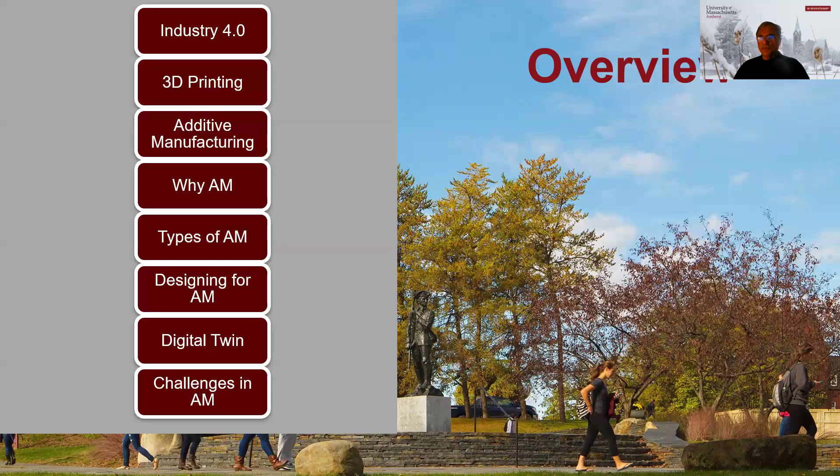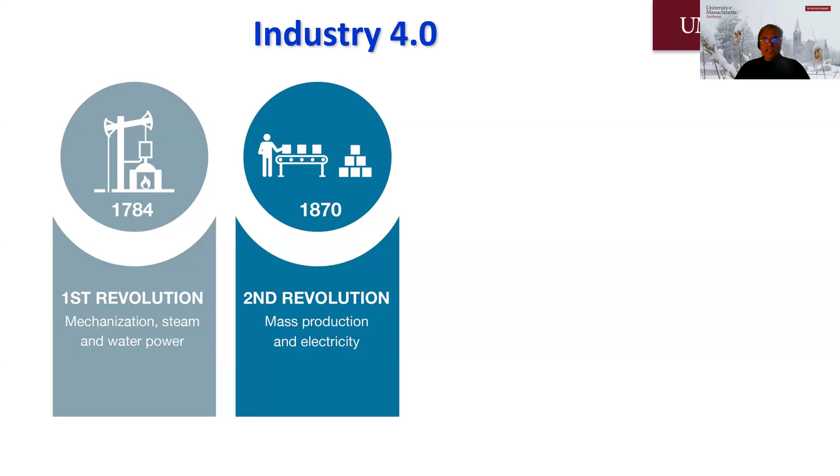Let me start by defining Industry 4.0. Probably some of you will be familiar with it, but it's nice to look at it in a cartoon way that illustrates the advancements we have made. We can go back in time and look at a definition of industry, probably somewhere in the 1780s - the first revolution, associated with mechanization. A lot of the work that came from that was primarily powered by steam or water. Then 100 years later, we got electricity, mass production became the norm, and electricity was a driver behind a lot of things that happened. Again it took another 100 years, then we started going into the third revolution. The date is a little fuzzy, but most people agree upon 1969 - electronics came into being, IT and other things, so automation became the real thing then.

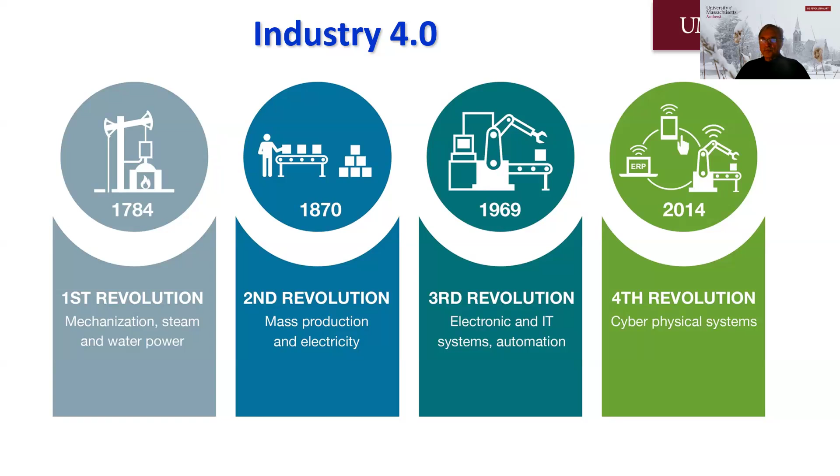And within 50 years, we have progressed to Industry 4.0, which has been kind of in vogue for the last 10 years or so, which is primarily connecting the dots between all the things in IoT, robotics, industrialization, mass production, customization. And so that's where we are now. A lot of people refer to advanced manufacturing as Industry 4.0, so you'll hear the term often in both academic and industry perspective.

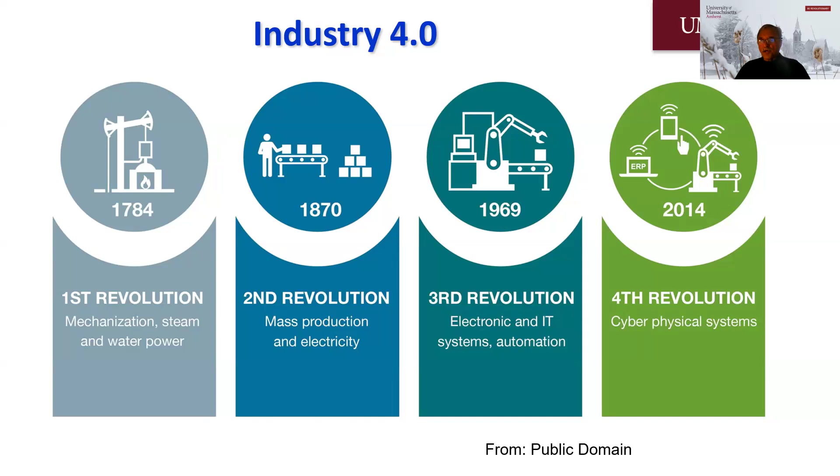So I typically cite sources for all the things I'm going to be talking about today, but this one you can find in the public domain. And this one I got from a colleague, and I don't have his notes with me right now.

So this is kind of a deeper dive into Industry 4.0. There are all kinds of things here. Primarily, it's the ERP, the Enterprise Resource Planning. That means you want to create an ecosystem where manufacturing is not siloed.

With all due respect to Arul and all our fond memories of TA, by definition, by referring to it as TA, it was decoupled from our education side. It was not physics, not chemistry. It was not a mechanical engineering course or civil engineering course. Rather, it was clubbed as technical arts. I still argue with people why that should not be the case.

But be that as it may, now if you see these things, lots of advancement is happening in different things. I'm going to just zoom in on two topics for today, even though our group has worked in some of the other things. But my primary interest all through my career has been in simulation, focusing on design and additive manufacturing. We got into it about 10 years ago, when things were in the right place, the right time, so to speak. So I'll walk through some definitions of additive manufacturing, and come back to simulation as the driver behind the digital twin.

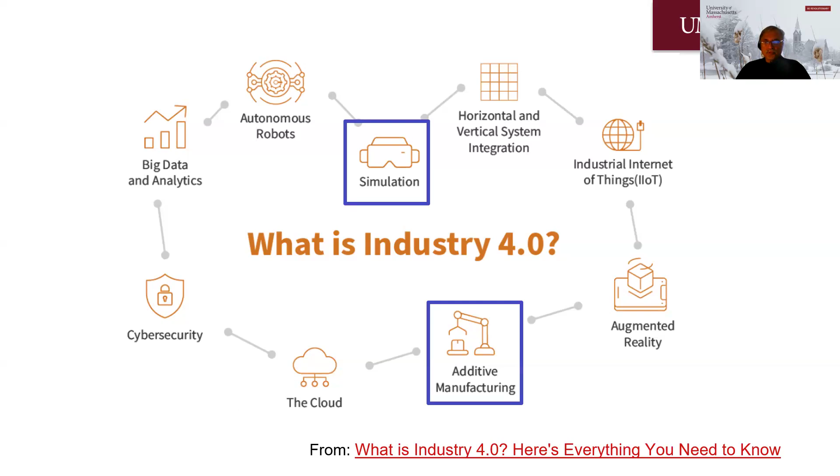All right, so what's additive manufacturing? It's straightforward. Arul mentioned CAD. It's a driver for additive manufacturing. You can go back in time. I know there have been jokes going around in different groups about orthographic views and all those things that we did as part of our engineering drawing. That is so passe. Everything is digital 3D, and CAD came into full existence in the 80s. That got me into my interest in design. And now that's a driver behind everything in additive manufacturing.

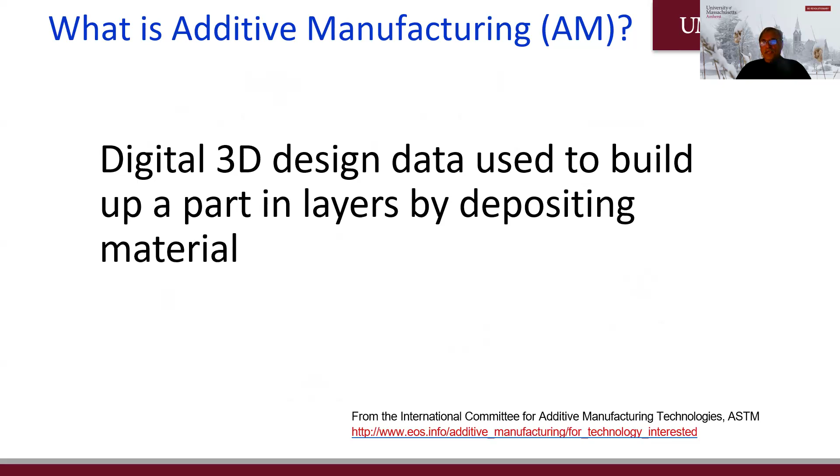So this is the formal definition. But oftentimes when you look at it, it makes perfect sense, because everything we learned about is subtractive manufacturing. We took a block of material. We did drilling, grinding, lathe work, any machining. The whole definition of a machine shop is to hit the block and reduce it to the part we want. And we can look back and say, hey, that's all subtracted from the block of material.

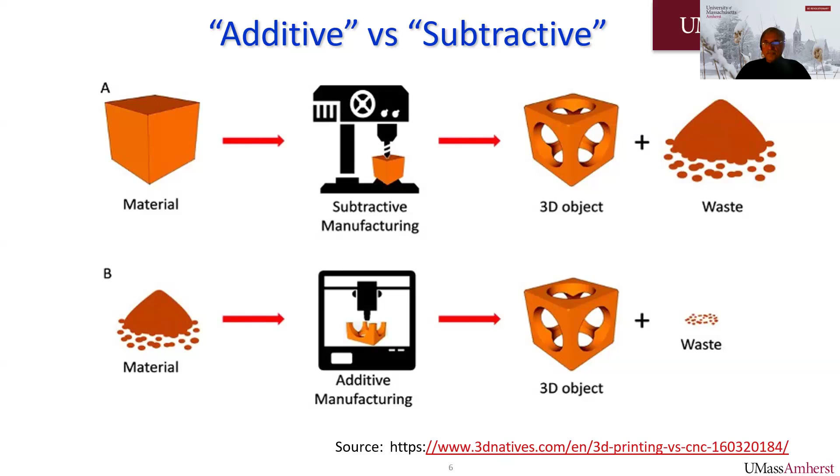Whereas additive manufacturing is mostly layer by layer: you take the material either in powder form or liquid form and construct it layer by layer. And that makes sense because now you are able to construct the object layer by layer. And if you're successful, the waste can be minimal. This is just a cartoon way of showing the same.

Another way of looking at this problem is that the subtractive process, material removal, is top down. We take from the top layer and go down to the bottom layer. Whereas with additive manufacturing, it's bottom up. You start with the base layer and go layer by layer to the top of your part. So you can look at it both ways, top down and bottom up.

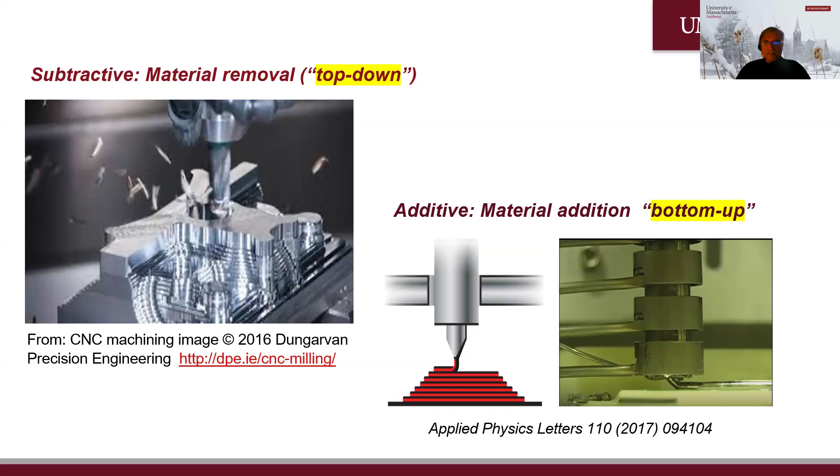But if you talk to people, especially in a non-engineering circle, you hear the term 3D printing. That makes sense because everyone can relate back to the inkjet printer and say, okay, instead of depositing ink, now we are depositing material. So in some sense, it is 3D printing, a synonym, but in the engineering sense it doesn't communicate the capabilities of additive manufacturing, which is that we can produce professional functional parts. I'll explain that in a couple of minutes.

And it clearly distinguishes it from all other processes we are more familiar with, referred to as subtractive. So additive manufacturing is a term used in professional circles, and people will use it to replace parts from a functional perspective.

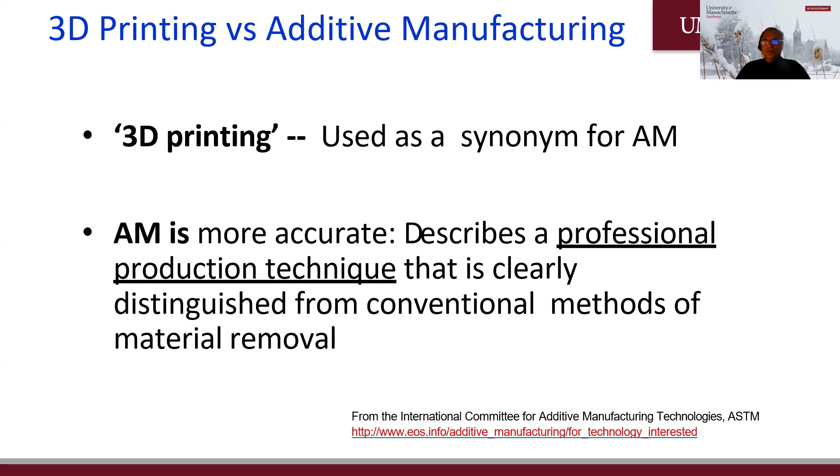Okay, so you see somebody has a question. No, I just put a comment. Okay, great. All right, I'll let you be the judge of that. Yeah, I'll monitor the chats.

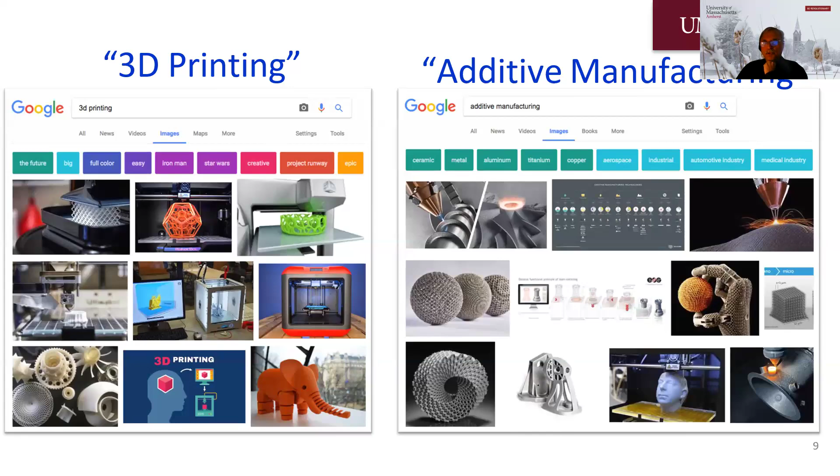There is a fundamental difference between 3D printing and additive manufacturing from how we plan to use it. So everything that we can see in terms of gadgets I refer to as 3D printing, and everything that's a functional replacement for a part that we want to use in our industry setting or other places would be the additive manufacturing part.

Okay, so then why? I will talk a little bit more about our NAE study, which is interesting in its own merits. But here are some slides from a friend that I work with, and we put these together. So we compartmentalize the rationale for additive manufacturing into 4 buckets. First and foremost, we can produce functional prototypes. So not necessarily in the production phase. In the prototyping phase, it can be cost prohibitive to invest in casting or anything more large scale, whereas a functional prototype using 3D printing or additive manufacturing can be an excellent start point.

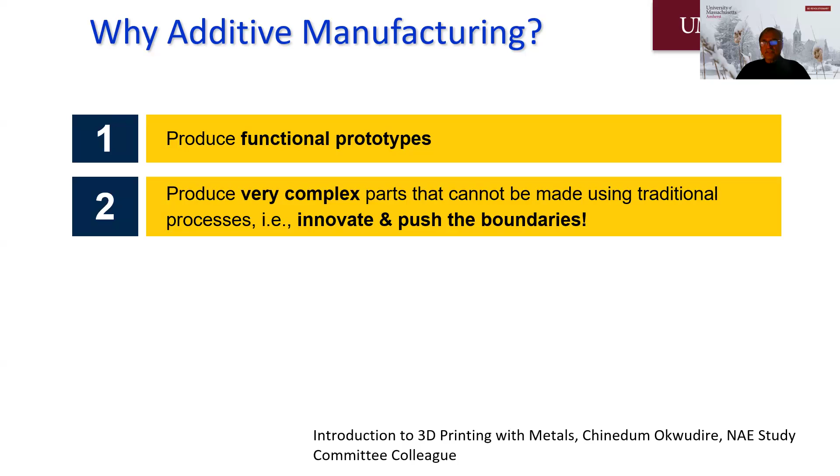We can produce very complex parts. I'll show some examples. And truly, this is where I think the most optimal use of additive manufacturing is: it puts innovation in front of all manufacturing engineers rather than at the back end, where after all the innovation is done, they just go make the part. So in that sense, it can push the boundaries. We can rethink our materials. We can rethink our CAD representations. We can rethink part structures, everything.

Of course, it's also viable for low volume. Whether you produce 1 part or 1,000 parts, the cost is proportional, not otherwise, as in the case of traditional. Last but not least, and this is some of the project work we do with the Navy and also one with the Air Force, is maintenance and repairs of parts that are sometimes not even in production anymore, or you're in a place where you can't afford to wait for the repair of parts to happen. So in those situations, additive manufacturing is an excellent alternative to the traditional way of manufacturing.

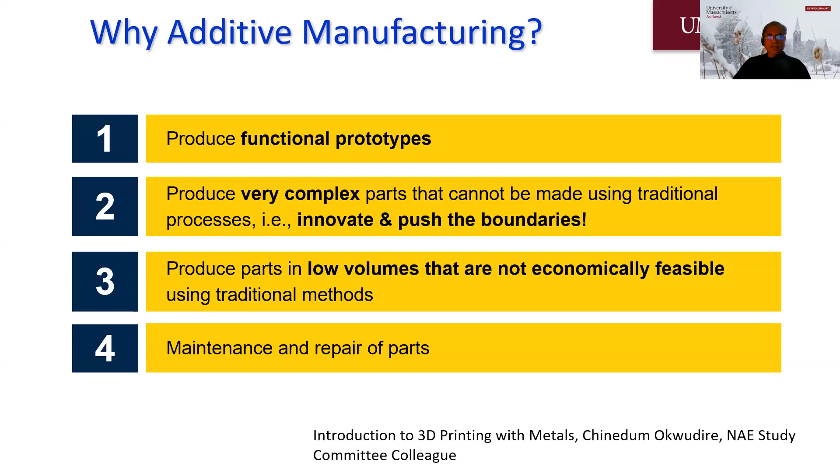Again, we've done some work with medical device companies, and the advancement is just absolutely mind-blowing. They can produce replacement parts which are light and strong and of inert material, and also customized to each individual patient. And we've seen this in use all the time, it is really happening. And last but not least, they found that these complex bone-like structures can actually stimulate bone growth.

So here, where we have taken a divergence from our traditional way of looking at it, is we are not constrained by the materials anymore. We can mix and match and produce materials that were previously unthinkable. And so I can show you some examples of this. I got this from the 3D printer.

So Sundar, in that particular example, what material is it? I will tell you in a minute. It's a kind of composite material, mostly ceramics with other things included, and I will get back to you on that. I don't have it on top of my head. I did work with the UMass Medical School on one of these for their implant, and I'd have to go back. But mostly we did it with ceramics and some other material mixed with it. I will get back to you on that. Good question. Okay, thank you.

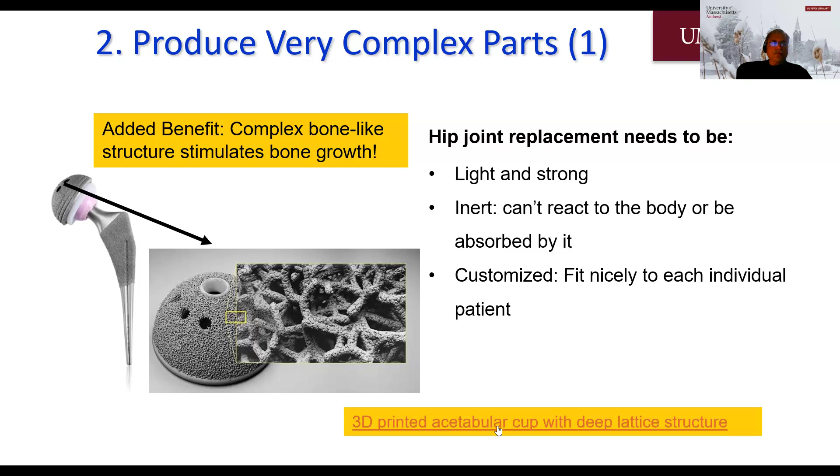And this is one of the coolest examples I have seen for producing complex parts, which are, again, not large in number, as in a prototyping phase or other things. It can be very helpful.

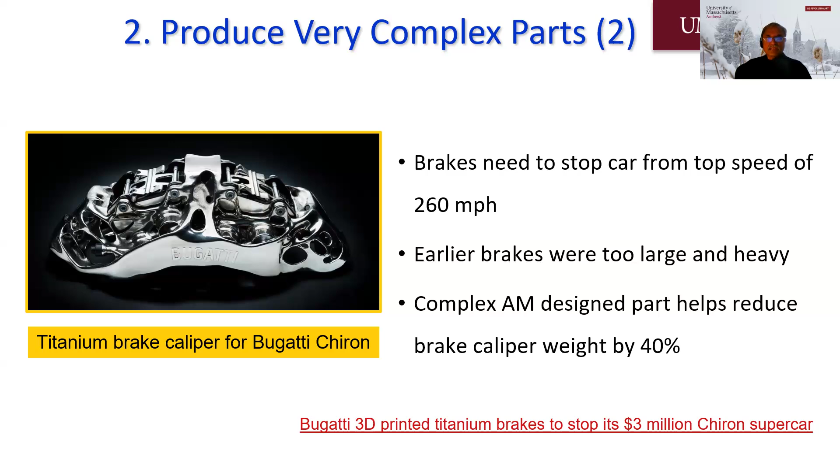The third one, again, is illustrative by itself. It's not a complex part, but you only need a few parts. This is typical for our industry partners, especially Raytheon. Raytheon has been funding our research for the last 25 years, and all their parts are low volume, and they don't want an outsourced place because of proprietary reasons. Even to enter the building, you have to have US citizenship, all kinds of protocols.

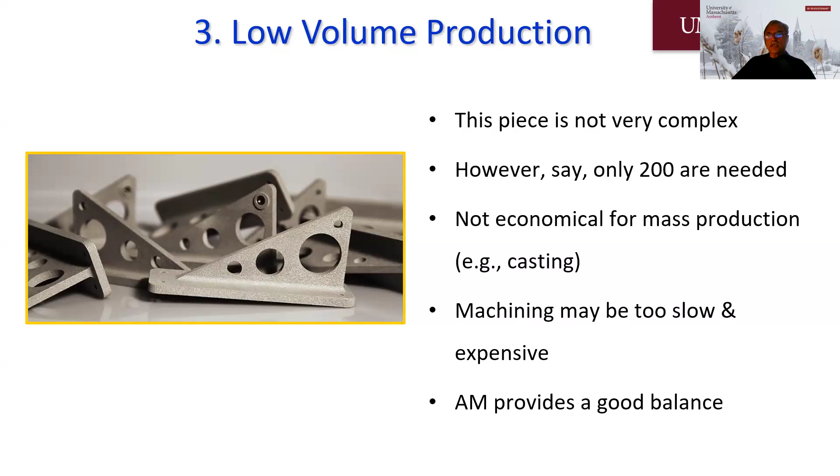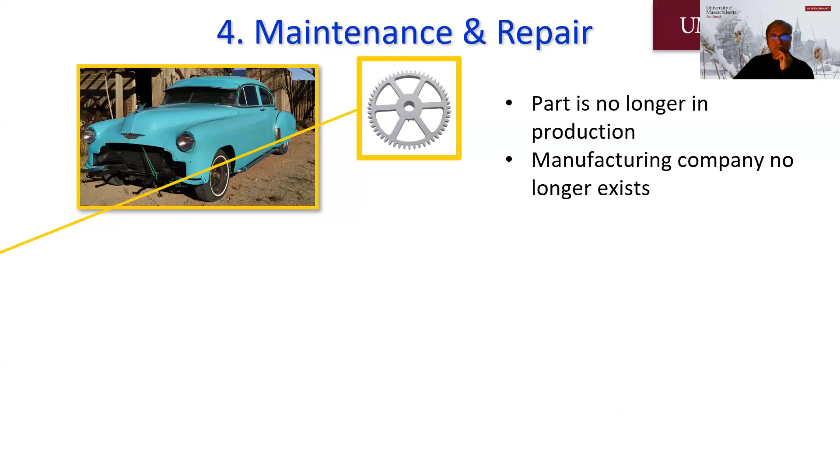And last but not least, this is the cartoon example of a part where you're trying to find a replacement part for your car. We put an old model car there, so the company is not in production, or the part is no longer available. You can 3D print the part and run it, and people have done it successfully. This is one of the projects we did as part of an SBIR phase 1 and phase 2 with a small company, and our work was not just the replacement part.

We were working with them on their naval system, where if the ship is out there miles away, how do we spot it? How do we do the inspection? How do we get the information back in the loop so they can have a digital twin set up at small scale to make a replacement in-house on the ship? They successfully did it for a couple of parts, but post-processing is another issue. So I would not say it's in practice, but it has been explored.

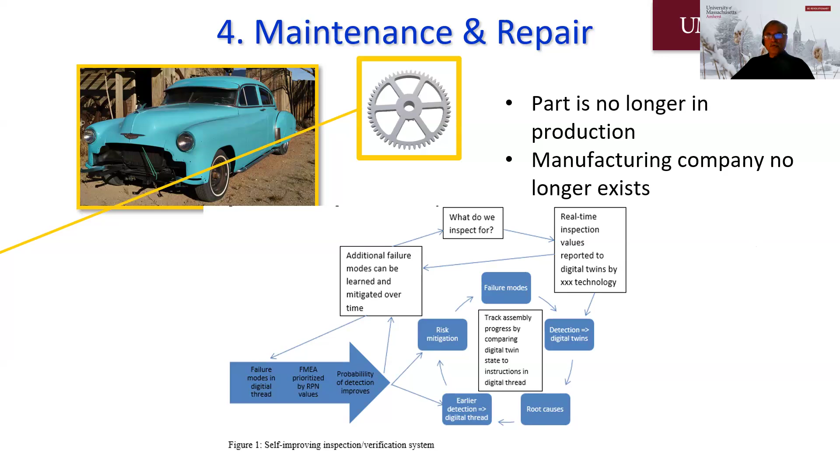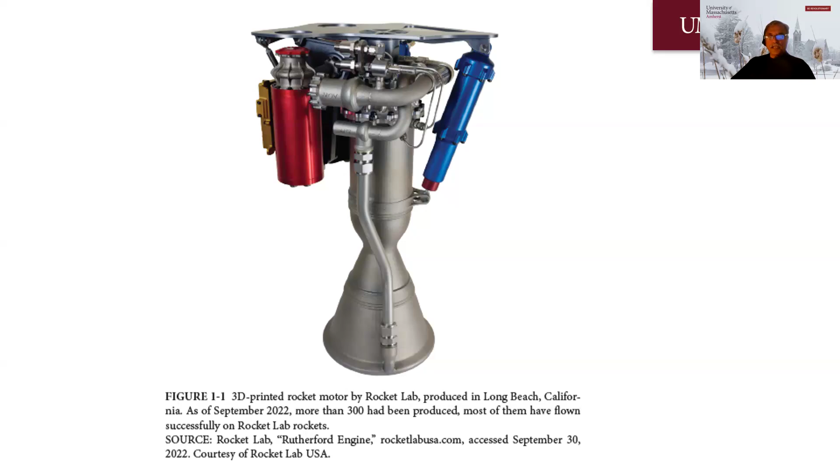So those are the 4 main reasons why we would use AM parts. And this one is the one I mentioned. This is from Rocket Lab, and it is a 3D printed rocket motor. Lots of news has come out about it. It's been referred to as one of the first of its kind, where they printed the whole motor using 3D printing.

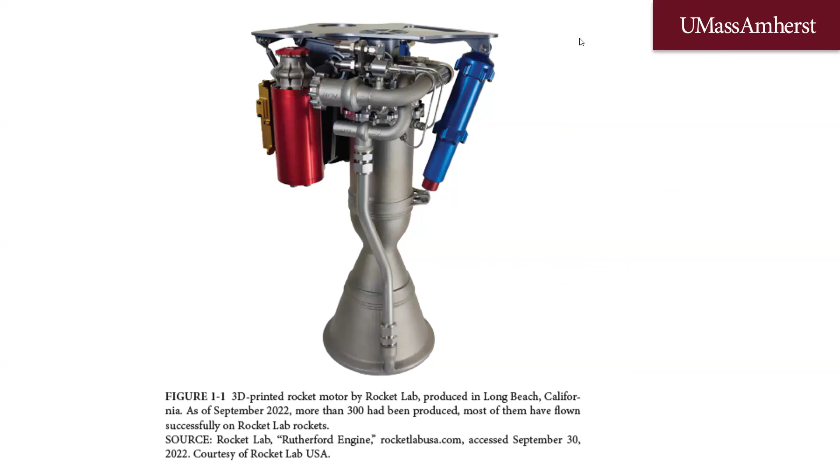Sundar, just so that I stay on top of this, 3D manufacturing, or like you said, the toy kind of facilities now seem to be universally available in what companies call maker labs. They have lots of 3D printers, and researchers can go and make fun things. But to make stuff out of titanium, steel, ceramic, how available are these in, let's say, your university? If students want to make things for their own projects, are these becoming more available? Are the operational costs fairly trivial?

It's surprising for you to ask the question. That's the second part of my talk. I didn't pay you to ask the question. So if you hold the question for a few minutes, that's the second part of my talk. Absolutely. Thank you. The first part of my talk is all talk, and the second part is where I feel there is a gap. That's where the challenges in AM will play a significant role.

And I have a small request: when you point to parts, if you could say a word or two on what the material is, because I'd like to get a sense of what is doable and what doesn't seem to be doable. Okay, I have a couple of slides that will walk you through that in a minute. These are more about the whole part. Hopefully that'll be helpful. If not, I'll try to spend more time on that. Thank you.

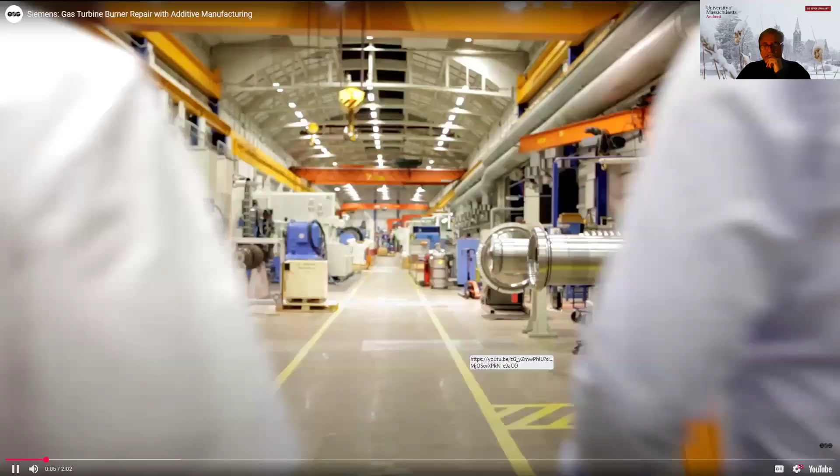Well, I will share this slide with us. And if you take a look at it, it is not just talk. So exactly the question was right - the big companies, the defense industries are able to do this.

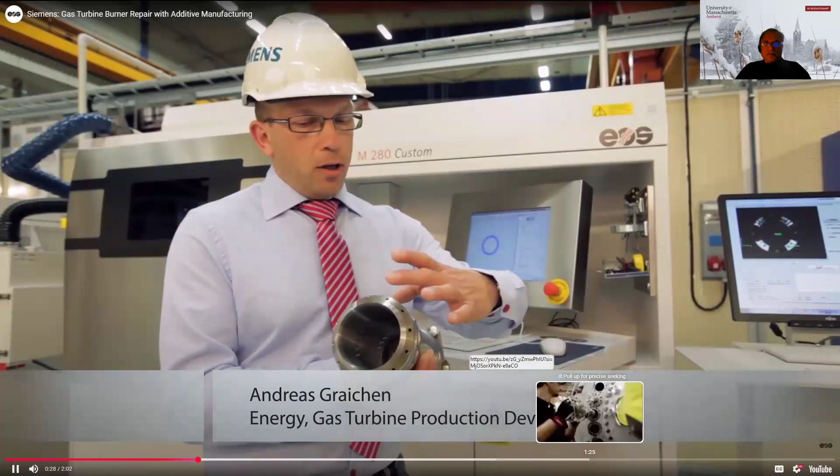Is it only me, or I don't get audio for this video? Oh okay, all right, hold on then. I'll skip this - it's not that important for now. Let's skip this, and I'll post it online for people to see if the audio is not coming through.

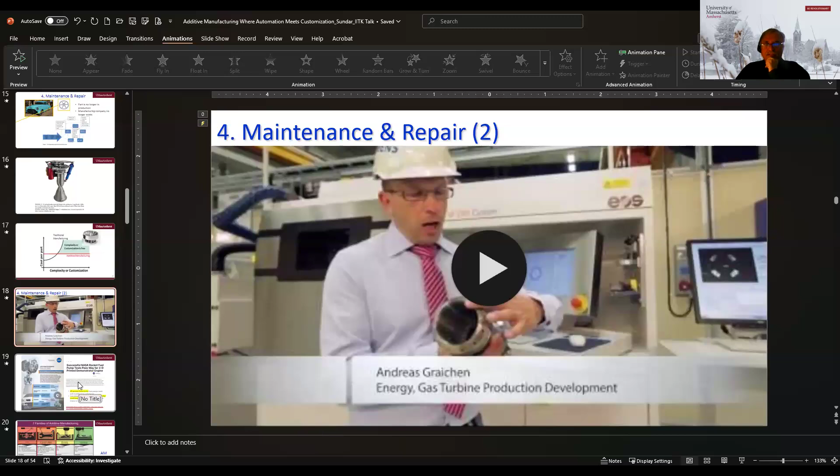It's interesting how they talk about it. Again, obviously these are all big companies, and point well taken. Let me close this with the slide that just came to me about 2 weeks ago, when we had a guest speaker on this. This is a successful rocket fuel pump that was just published 4 months ago, August... no wait, that's 2015, sorry, that's not right.

So this is 2015 - the 3D printed turbo pump. It can have a maximum RPM of 95,000, thrust potential, fuel delivery, horsepower, part count, and they claim it required 45% fewer parts, and it completed 15 different tests under flight-like conditions. So all this shows that the technology is there, it's ready, and it's offering a lot of potential for advancements.

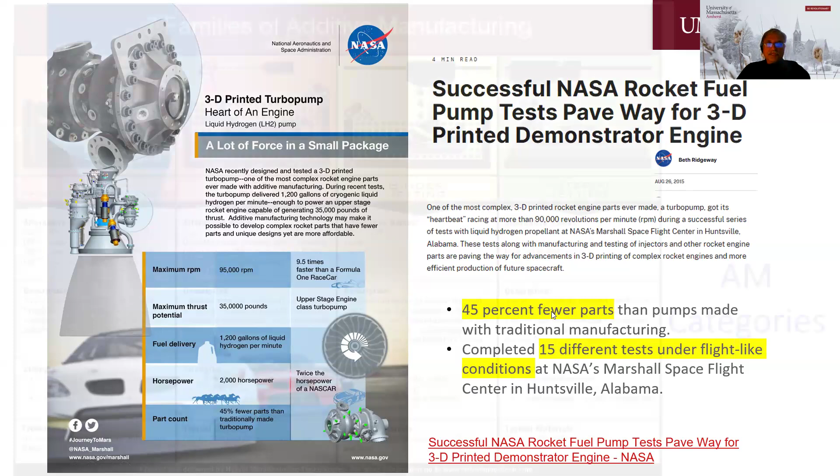So now, kind of reflecting on the question, what are the different types of... Sundar, if I can interrupt, Ravi Rao has a question. Ravi, do you want to read it out? You're muted, Ravi. But let me read it out.

Ravi says, in subtractive manufacturing, usually there is a finishing step. Is there a similar step for additive manufacturing? Also, can a part be used post-AM? Yeah, absolutely, there's a lot of post-processing you need to do to make the part ready to use.

Post-processing is part and parcel of all 3D printed or additively manufactured parts. Probably sometimes a little more than subtractive manufacturing, but those are things you can do in a small shop - it doesn't require much. First and foremost, some of the work in metal 3D printing comes with some kind of support structure that you have to take away. You have to do some polishing, grinding, finishing, surface finish, all those things. You have to do some heat treatment to make them meet your expectations. So yeah, all of them require some, to a large extent, post-processing.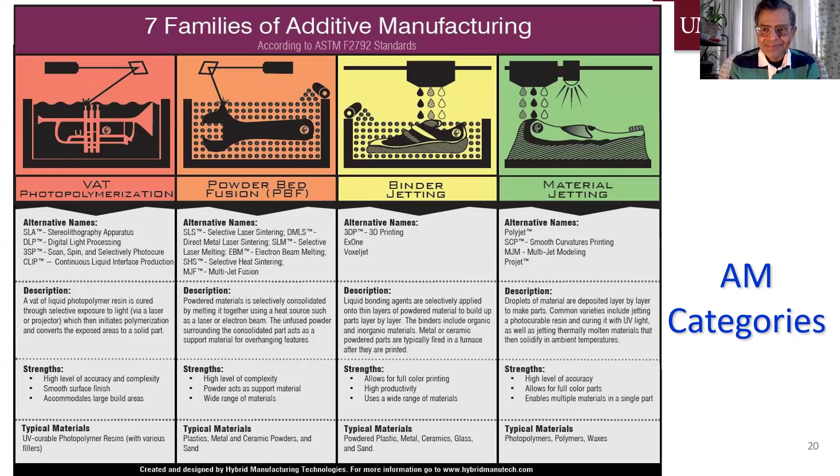Thanks, Sundar. Okay, here are what's referred to as the ASTM standards, and they have 7 different families of additive manufacturing. I am not an expert on all of them - I'll highlight the ones that I feel are most popular and appealing from the perspective of functional prototypes.

So we have photopolymerization, powder bed fusion, binder jetting, material jetting. If you go through it - and I'll share the slide - a lot of them will talk about what kind of material is a good fit. Photopolymerization is mostly photopolymer resins, and powder bed fusion covers plastics, metals, ceramics, everything. Each of them has a set of materials best fit for that, and obviously things depend on it.

If I talk to a company like Puma, a lot of them are working in binder jetting - looking at how to 3D print their shoes. So it's mostly all kind of polymeric materials. Each one has its own thing.

My interest, and most people who are looking at functional prototypes or functional replacement for manufacturing, the most popular one is powder bed fusion. So if you are curious about one type of additive manufacturing and want to see how things play out, take a look at powder bed fusion.

You will find different names for it. 10 years ago, we used to use SLS, selective laser sintering - that was the primary name. But these days, everybody uses powder bed fusion.

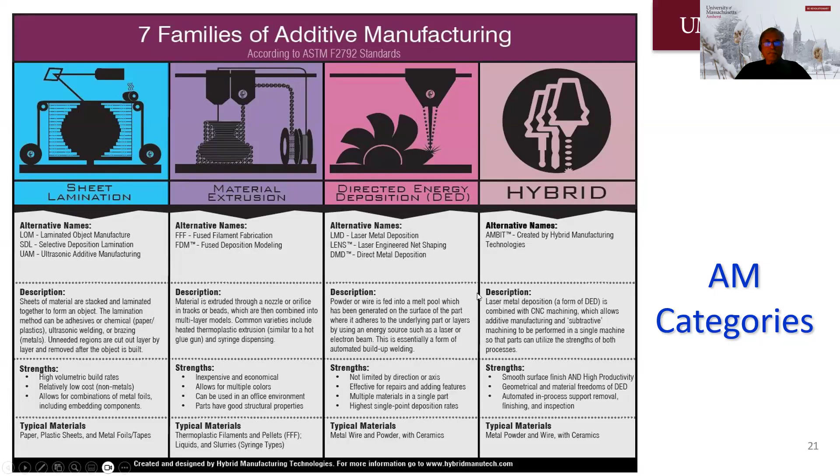So let me look at the two processes I mentioned. This is direct energy deposition. You can see it's being fed through a wire, or sometimes in liquid form too. You have the gun, and as the material is fed, you start applying energy and deposit it layer by layer. You have the substrate and the base, and everything is formed layer by layer. The feedstock can be a wire or a powder—mostly I've seen it as a wire or a powder.

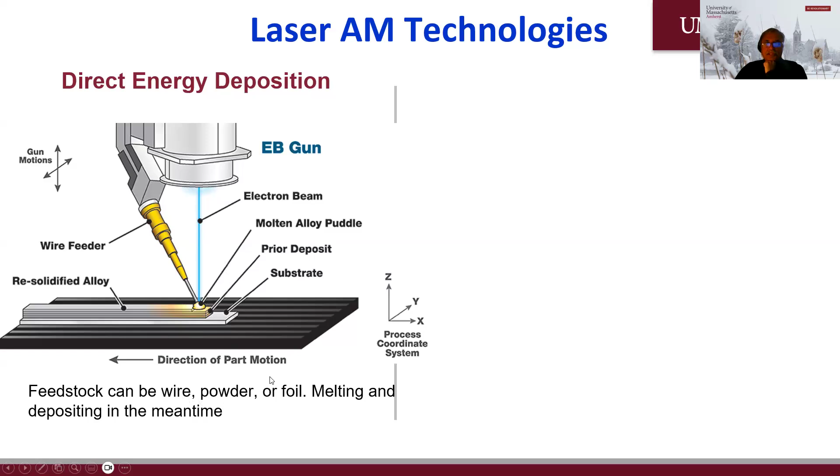The second one is where I know a bit more, because I've actually seen the process and the machines, and I've been fortunate to work with NIST, who've been partners for 10 years and have some really state-of-the-art systems. Here, everything is layer by layer—the powder is the layer. You have the substrate and the layer, and then a laser beam reflected through a mirror deposits it. It's all fascinatingly driven by the CAD system, which dictates the laser position, laser beam, laser speed, and laser direction. That dictates the quality of the part you're going to get.

Surprisingly, the cartoon or illustrated version is much easier than in reality. So designing for and designing with AM is still a big challenge. The reason for that is multifold—to start with, we don't have a material.

Sorry, Sundar, okay, can you go back? I didn't quite understand the drawing. I see the downward arrow showing the part being constructed bottom up. How is the powder deposited? Is it deposited as a sheet and then stuff is just removed and the laser sinters it, or how does it work? I see, so there's a sheet of powder, spread powder. Yep, each layer, the powder is rolled from the tank—the roller comes and rolls the powder. Got it, I get it. And then you just sinter the parts you need. Yeah, and then you push away the unused powder, so to speak, and the next layer comes in. Yeah, yep, got it, thank you. And that's why you need not just a substrate, you also need a support structure. And this goes back to the earlier question—if you're looking at this as a 3D printed part, each shape can be different, so you have to have some kind of support structure holding the part together. Yeah, and there's a lot of complicated stuff with overhanging and other things. Yeah, got it, good question. Yeah, thank you.

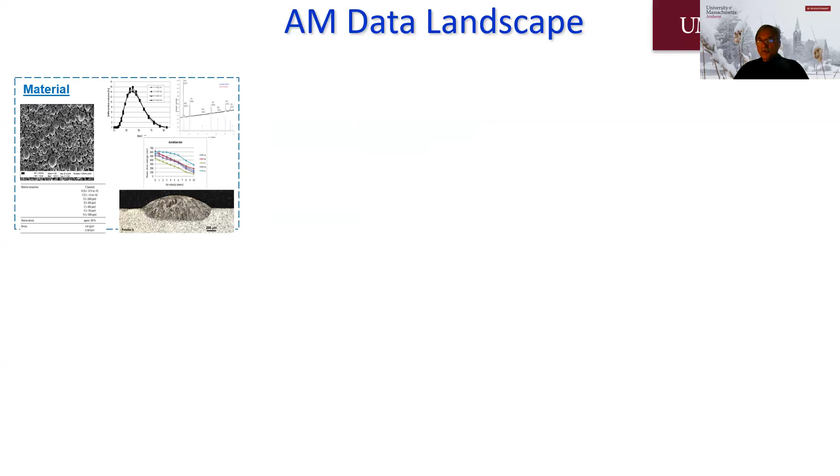So this is where I've taken a lot of interest, and our group has done a lot of work. The first and foremost is the material. Primarily, you can do anything with the powder—you can combine powders, but powders are hard to define in terms of material properties. Going back to our favorite subject of metallurgy, everything we learned about materials comes from, hey, a material handbook that says steel has this property. You look at ASTM, it defines what the steel property is. So if I machine it, I know the property is more or less the same—I know what the yield strength will be, what the material property will be, what the heat transfer is, all those things are known. But when you're dealing with powder, it's a lot more uncertain what the final product will be. The second issue is that the design itself is not that much more traditional.

A lot of things that we used to think in terms of, hey, not possible. Now everything is possible. So I can show structures, and you have seen the motor that was built. This is complicated. So it's not easy for us to design in a more traditional way.

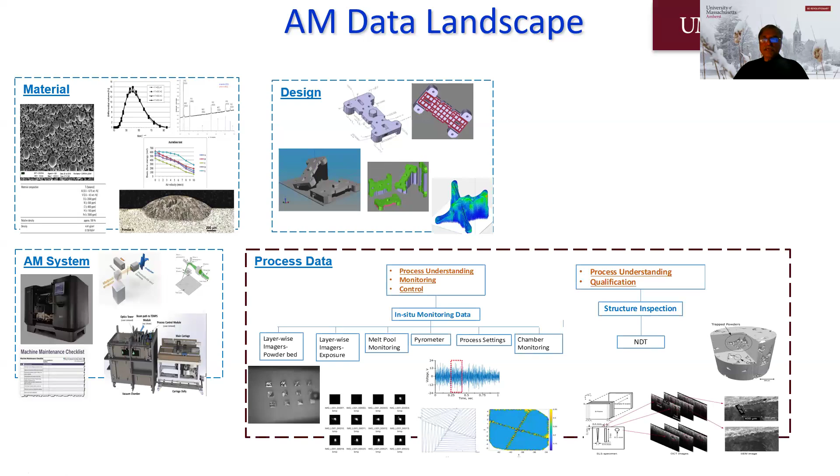The third challenge is that the system itself has not been authenticated. It is not validated. It is one of the biggest challenges. There are plenty of AM manufacturers, and each of them claims they can produce quality parts, but there's no verification. There is no standard that we can apply to say, hey, if I use this system, will I get the part that meets my qualification?

And the last but not least is the process data. The process, again, you can probably remember some other things we learned in casting, or people are familiar with injection molding. It goes through so many layers in terms of its phase transformation to everything. It is hard to compartmentalize and categorize and qualify all the things.

I'm not sure why he's doing this. Sorry about it.

So we're going to focus on the processing parameters for just sake of illustration. Just the processing parameters itself, you have the laser type, the laser power, a whole host of things. And if I look at the material properties, again, there's a bucket list of things that you can look at as what should we look for in terms of metrics, qualification for a part.

So one other thing that is still an ongoing discussion is how do we get to know the properties of the material as the process is doing it, not post-processing. We can always do it afterwards. We do the post-processing, we can go and do the testing and the prototyping and say, okay, that's the problem. But we want to design with it. That means we need to know a priori.

So that's the challenge. And so the work that we did was trying to understand predictive models. This probably other people will relate to. This is the same thing all of us are looking at. 10 years ago, when we started this, we used to refer to this as qualification. These days, we refer to this as metrics. That's more of a nomenclature change.

And the second part is, so what's happening, which is what we used to call process control. These days, we refer to that as analytics or data analytics. And the third part is the what will happen, which we used to, again, in our glory days, call optimization. We switched to predictive analytics. So predictive analytics requires us to have some kind of a model or simulation that will be helpful for us to a priori know what can we expect from the process.

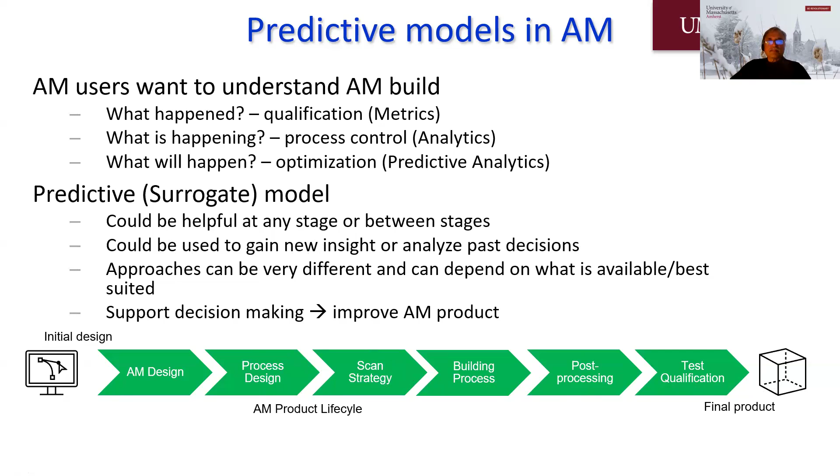That's a hypothesis. So what we did was, this is again very simplistic, our approach is that we constructed two different sets. One we refer to as the white box, which is all based on physics, FEA, CFD, or anything that we know about the physics of the problem. The second one is the black box, where it's all based on data. That's the one I refer to as the machine learning or statistical model.

Of course, neither one is an easy challenge, but we have a lot more work done in the black box side of things. So we teamed up with researchers at NIST. So we did the FEA model, the CFD model. They use different types of continuum-based heat transfer models, powder-based thermal fluid flow models. So they were able to give us some physics-based model representation for what they expect the outcome to be.

And then we construct our black box model. So we worked for 3 years, with 2 of our PhDs and 2 of our researchers. We looked at it and we did a lot of different things.

I won't bore you with the details, but the idea is how can we build a hybrid, which we refer to as a gray box, where we make the best of both. So we can use the FEA model or CFD models to help train the data set and collect the data, and use that in situ to update the model while we are doing the process itself.

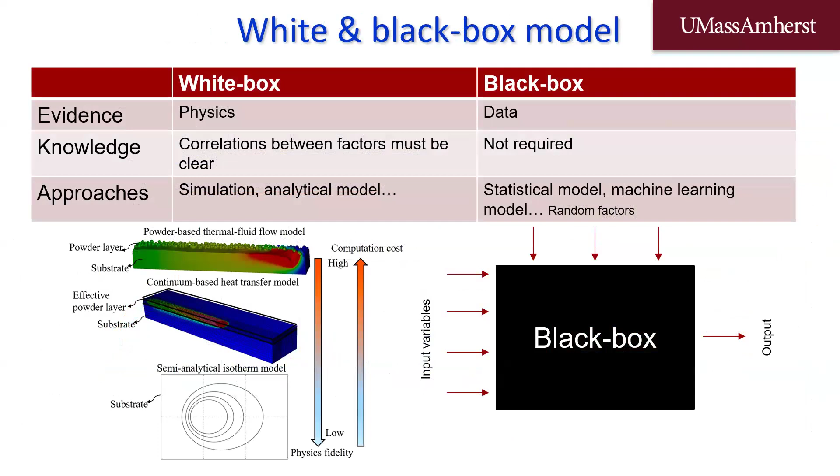Sorry, Sundar, again. Okay, a bit slower than the rest, I guess. So, go back to the CFD model. I didn't quite understand what exactly is being modeled in these three pictures down there. Is it the complete structure, or is it the effective powder layer?

Great, that's my next slide. Okay, good. So we did not look at the complete structure, I'll tell you what we looked at. That's a very good question. Most people think that during additive manufacturing, the best information you can get about the metrics you're looking at is the melt pool, which is supposed to reflect the quality of the part. The melt pool is what forms as you go layer by layer, and the melt pool information will tell you about the state of quality of the part later. A lot of work has been done to identify the melt pool as a single parameter we can use to hypothesize about the quality of the part. So all we're focusing on here is the melt pool formation.

What is the melt pool in the wire model you had? You were melting something and it was creating a puddle. Oh yeah, this is on the powder bed fusion side. So this is the powder here, and when you heat the powder to form the part, as you turn the direction and change the speed, there will be places where you can see this effect in the setup. You'll see different places have different formation of the part, and if you zoom in, the reds show where a high melt pool is forming, and they're not forming the metal immediately, so they're leaving that as a melt pool.

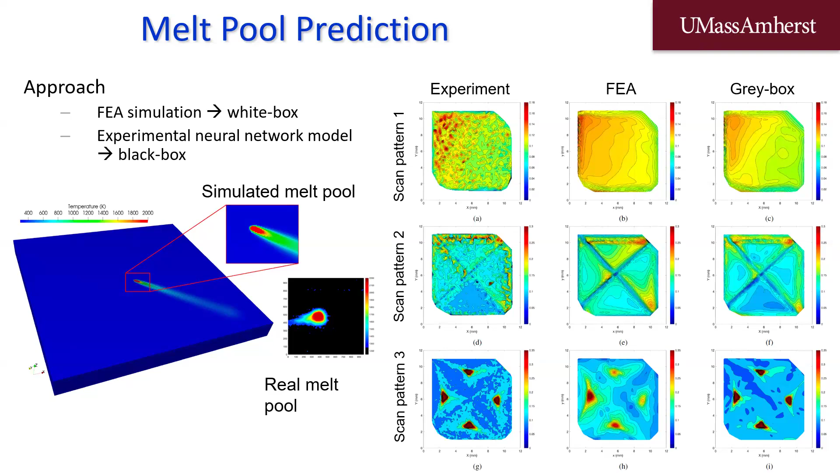So for us to even get any information while it's being done has been a huge challenge. Yeah, I mean, the stuff to be looked at, I would say there's learning in the IC industry. They had to figure it out. Now the speeds may not be what you're talking about, but you could do it every 10th layer or so. Oh yeah, that kind of thing we do.

That is part of the reason why this project was focusing on melt pool. There's a lot of effort into figuring out where, I'll show in the next slide, the most vulnerable places are that you should look at. People who are in FEA or materials will know you don't look at the whole part. You just want to look at the part where it is likely to fail, and make sure that part won't fail, then assume the rest of the part will be fine.

So if that is your failure condition, you look at it. But if it's cost reduction, then you look at where can I reduce the part and make it not as heavy, so I can reduce the weight and cost. So lots of different competing factors come in, and people are looking at it. If you're looking that way, yes, but not while the thing is made. It is done either before the part is sent, or post-processing after the part is made.

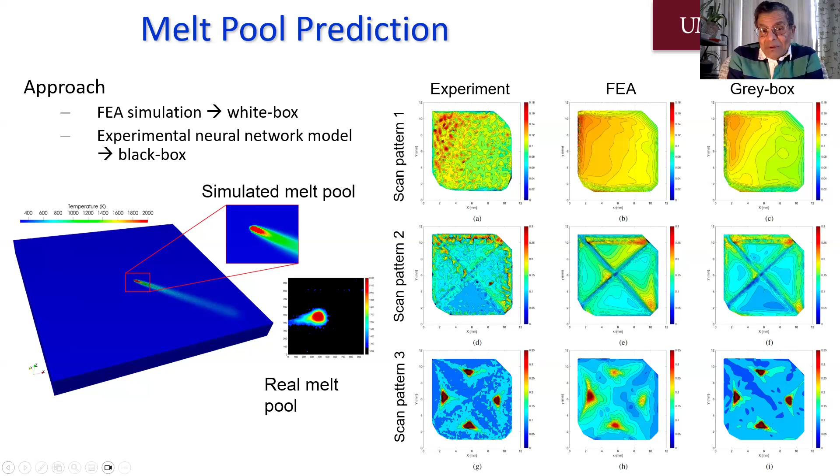So Sundar, in interest of time, you might want to move on to your next slide. All right, great, we'll come back to it. Okay, yeah, good, there are a lot of good questions. I'll show, I'm not a single person looking at it.

This is another kind of graphical view showing the same thing that we did. Again, you have a physics-based model, you have some dimension reduction, you have some surrogate model. Again, nothing fancy here, very similar to what we showed with fancy names, but otherwise the same.

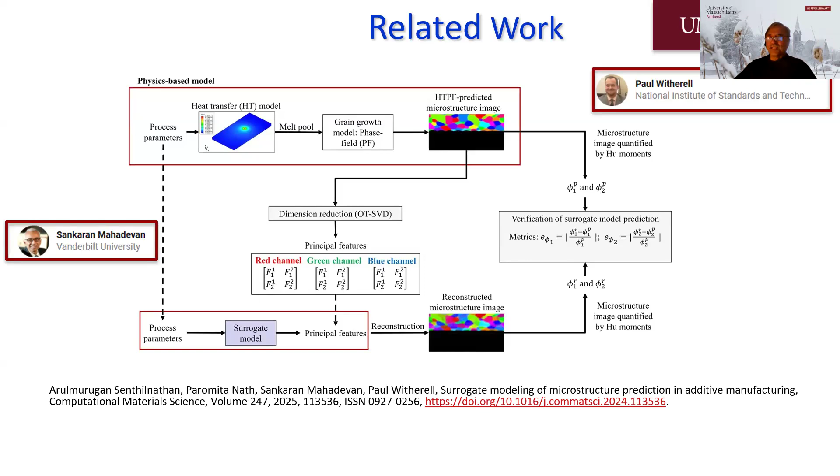But I want to highlight this. Paul Witherell was my former student. He's now a fellow at NIST. And guess who is his collaborator? Mahadevan, our own colleague, classmate, is a collaborator, and it's kind of interesting that it's a small world. Unfortunately, I think Mahadevan cannot join us today, but again, this is work that not just I'm doing, but lots of people are doing. And I was thrilled to find that two people connected to me are working on the same problem.

Okay, now I just showed you one project that we did for one type of thing we looked at. Over the last 10 years, our group has done a lot of different things. I could have given a lecture on ontology, and I think I would have partnered with our friend Shirish on that. He's done a lot of work, and a lot of things you read here, which I won't bore you with, but what I showed you is just one fraction of the problem we face.

Sundar, you mentioned the name Sresh Netke, or Sresh? Netke has done a lot of work in ontology. Yeah, we talked about it offline. Yep, he's done a lot of work on ontology, and that is basically standard — how to come up with a standard for manufacturing, especially additive manufacturing. What we look at are the metrics, what should be the language we should be talking about, and how do we interpret the same information given between two people.

Yeah, yeah, that's great. I didn't know Netcase's versatile expertise from blockchain to ontology. Go ahead. So blockchain is, I think, today's interest. This is about ontology. He and I talked about 10 years ago, or 5 years ago, I should say.

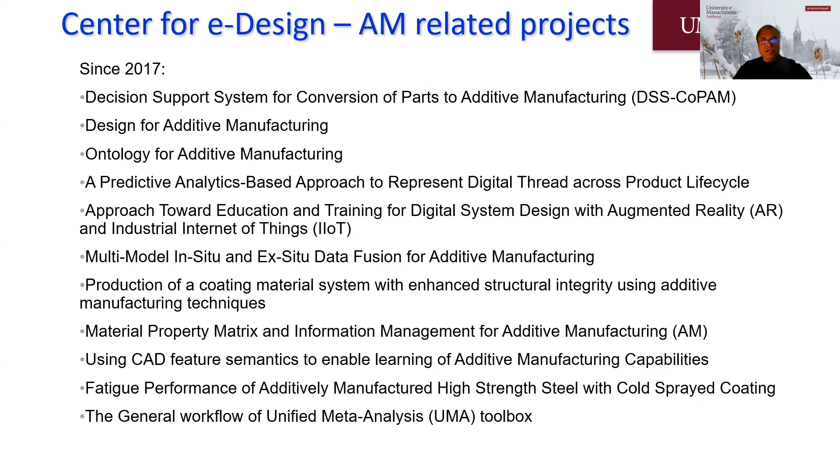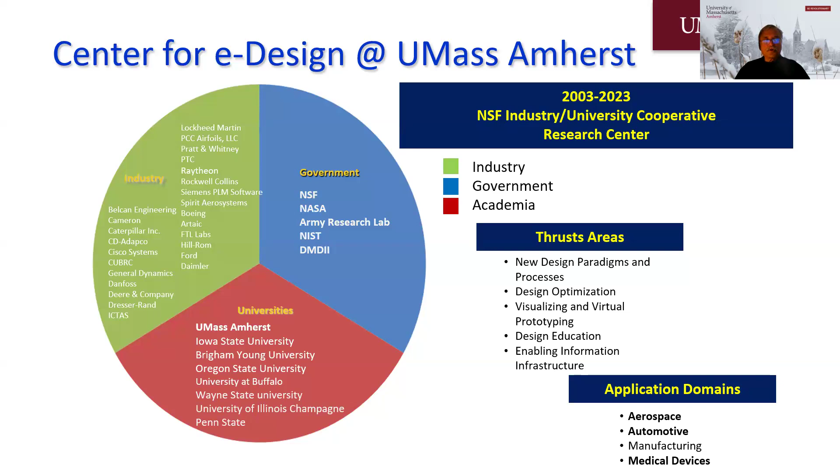Yeah, okay, got it. So the center that we ran, again, that was solved for the manufacturing, but we did a lot of work in aerospace, automotive, and medical devices. We teamed up with some 20 industries over a period of time and 7 universities as members. So we did a lot of work. 3 years ago, we closed the shop because it's a 15-year project. We somehow continued for 20. There's still a lot of things going on, but a lot of our partners are in different places now.

But taking a look back, this is Sanjay's question. The holy grail is how to come up with a digital twin for additive manufacturing. This is where simulation, additive manufacturing, and IoT, the 3 things, will come together and form the basis for any design decisions we make using physics-based simulation. AI, again, this is a real question. This is the physics-based simulation that we learned and we all used for long periods of time.

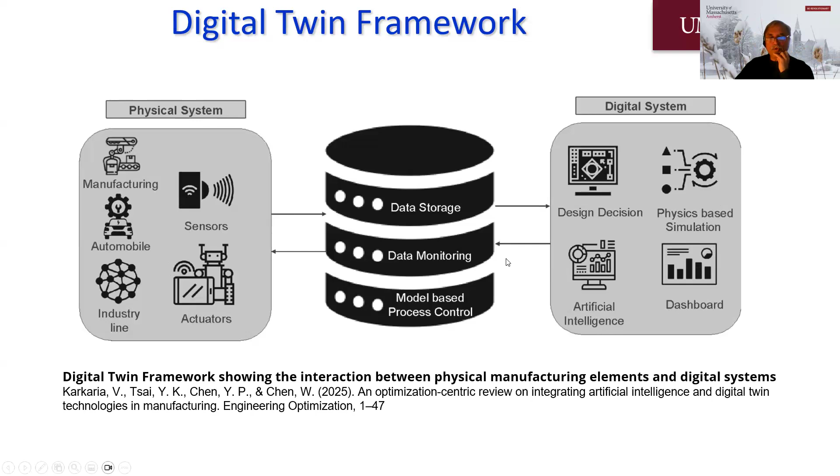Design decisions, which is some of the questions that I've asked, and how can you have some kind of a dashboard that synthesizes the information so we can run the system that is running here while sitting here. And this is, again, the holy grail, but lots of people are looking at it, including our group. The same thing when I talk to industry, they don't see it the same way. It's just a disconnect. That's kind of leading to my second part of the talk.

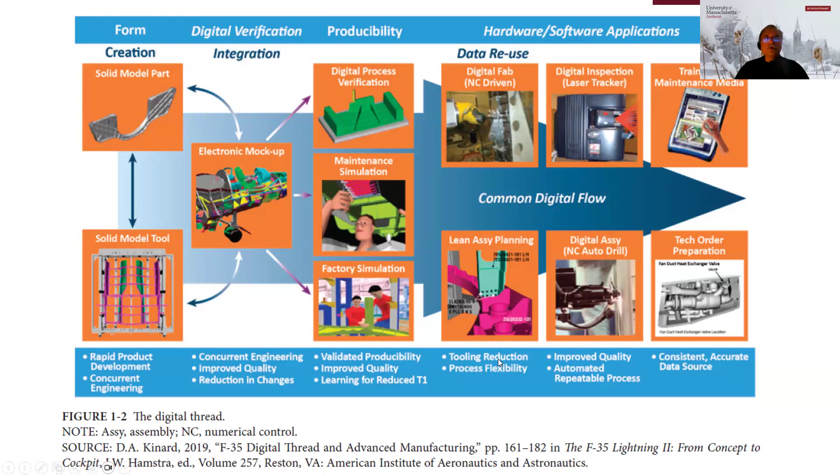Again, they have nothing about AI, nothing about anything else, because they are worried about it. They don't want to use AI, especially in defense industries. They just want everything to be proprietary in-house. Anyway, they use this, they won't tell you. So it's a very different way how they look at it. But nonetheless, it takes me to the challenges we face. I only posted some introductory things, and what we have done is a little bit of here and there.

But this is recognized. This is the National Science Foundation, Resilient Manufacturing, a group that I work with. One of our team is now applying for funding from them. And they identified all these things as a kind of ongoing problem in making advanced manufacturing and additive manufacturing a reality. I don't want to bore you with the details, but you can see everything we talked about, everything you can think of, is still an issue.

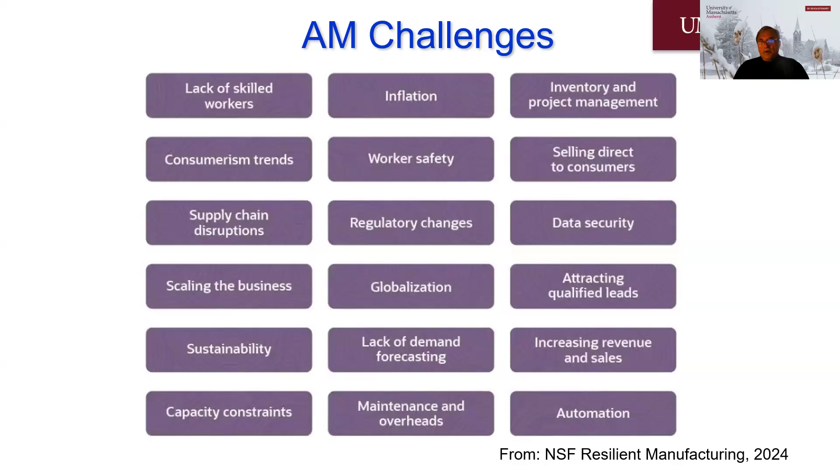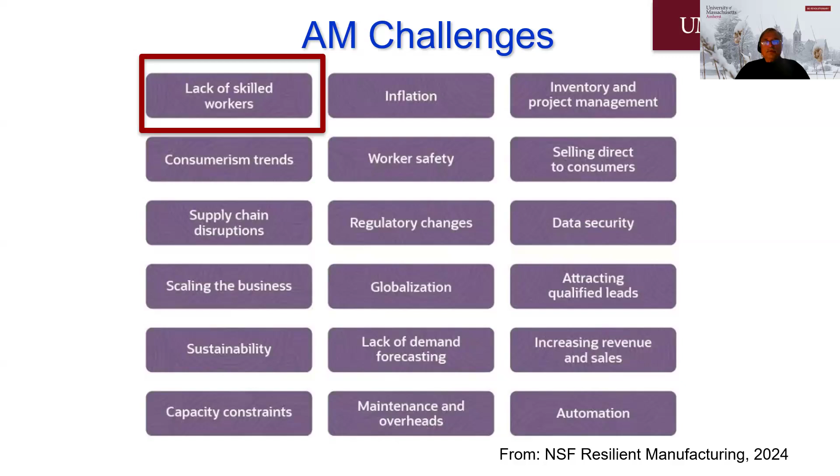But the one that appealed to me, being in the academic setting, is the lack of skilled workers. And maybe that is tied to an earlier question asked about scaling the business. I could have spent some time on it. I'll try to see if I can relate to both. The scaling of the business is, hey, every example I showed is probably done by some large manufacturer or defense industry. What about the SMEs? What about the small scale industries? How can they afford to even have an additive manufacturing unit, let alone metal 3D printing?

Okay, so this is focusing on America's advanced manufacturing workforce, but I can use this from when I went to IISc Bangalore last year. This is my talk, and they were equally sharing our concern that manufacturing is not seen as a part of innovation. It's a disconnected workforce education system. That's why I want to go back to our statement. All due respect, in our manufacturing, all we remember is what we broke in the lab. It is the TA, considered as decoupled from what we learned in our classroom.

It was also done in the early years, first and second years, where we haven't quite gotten the full breadth of our knowledge about engineering. And so I've taken a deeper dive into it. I've become an advocate for it. There are 550 universities in the US alone that offer a BS degree in mechanical engineering. There are less than 30 universities that offer an undergraduate degree in manufacturing. And if I look at the 30, only 2 of them have any research component we consider as R1 university.

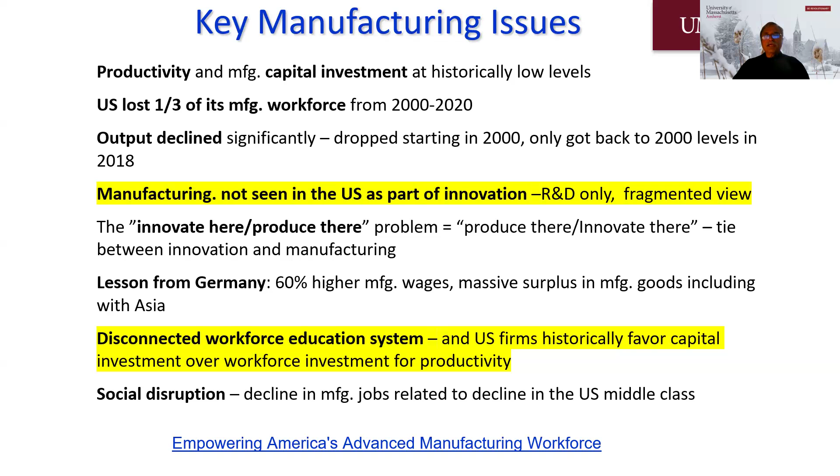So there is a disconnect. And most of the students in manufacturing, either they'll go to what we refer to here as a community college or vocational schools. In India, it's the same. They get sent to vocational schools and they get training. All of us got exposure, but never got expertise in manufacturing.

I talked to a lot of people, so this is kind of a work, again, organized by the National Materials and Manufacturing Board and NAE. And I'll just highlight our buddy here. Arul was the study co-director for us. And you can see the list of people, kind of half from industry and half from academia. We spent about 2 years, and during COVID, we did a lot of work.

I'll again summarize things that might resonate with us in sense of my passion for why manufacturing is underappreciated. I skip it for the lack of time. So the things that we focused on was increased collaboration between academia and industry. Again, this is something that resonates well for today's engineering, especially.

All our 5 years, I don't think we heard a single mention of an industry, at least I don't remember, because I don't remember a lot of things. Industry was never mentioned until the time we started applying for jobs. That's the only time anybody will talk about somebody got a job at this place. Even the interviews mostly focused on what we know or what we should know, but nothing about manufacturing, nothing about what the industry expects us to do.

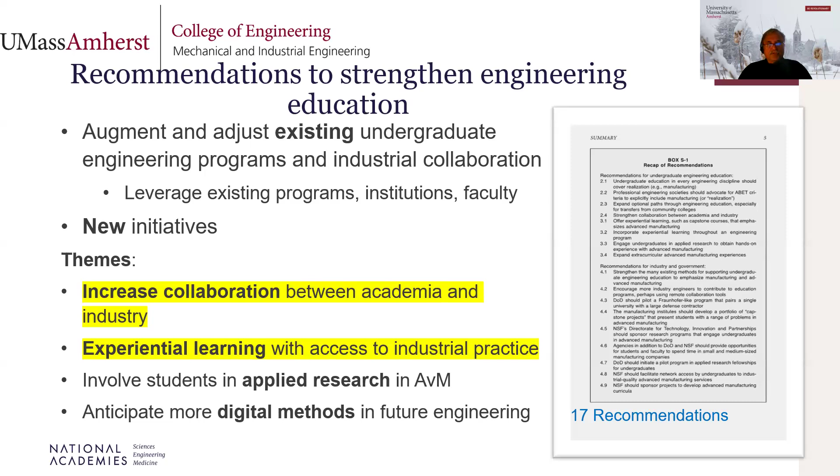At the same time, the experiential learning was also missing. We had some labs that I fondly remember as great, especially for physics and some of the materials courses, but nothing later on in engineering that related what we learned in our classroom to how things get manufactured. So the experiential learning involves being in the lab manufacturing, what we refer to as the capstone design today, where we actually produce things. So those are 2 things that I've been talking about.

And I looked at the courses in today's curriculum at IIT Kanpur here. You can see on the left, all these courses are familiar to us. Things haven't changed, which is good news and not so good news. But manufacturing science and technology, I'm happy to see as a required course, but just a single course. And I talked to the faculty who's teaching it and looked at the materials they cover. And you can see the material covered is all about more traditional manufacturing. Good. Traditional manufacturing should be taught to them.

But they have an advanced course, 461, but that's more of an optional course. But there's nothing really about what they need about advanced manufacturing. This is the TA 202. Again, a lot of talk about it. So I took a closer look at what they do. This is today's TA 202. And I didn't see much change from what we did. And maybe there is some change, but it's not enough, in my opinion, because manufacturing is through the roof.

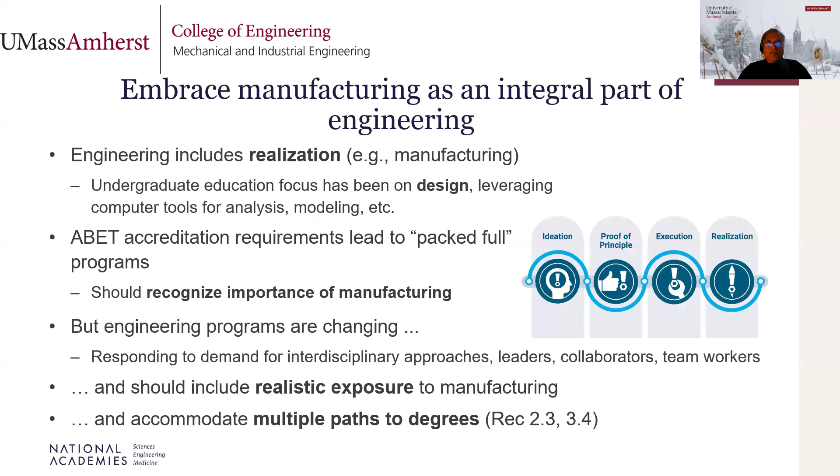It does talk about microfabrication, layered manufacturing and metrology. That's great. But I don't think enough importance is given to how manufacturing can play a role in design, in CAD. Everything we do in any engineering topic should relate back to manufacturing. So that's the same here. So we talked about it. Again, I'm going to skip this, lack of time.

So we looked at a lot of things, and this is the thing that I wish I had the opportunity for, and I wish the students in today's world would have it. Actually produce the part, or manufacture the part, or work with the industry where they can learn how to manufacture the part when they are doing their capstone, whatever course they're doing, whatever design they're doing. It'll be so illuminating and illustrative to couple both engineering and manufacturing.

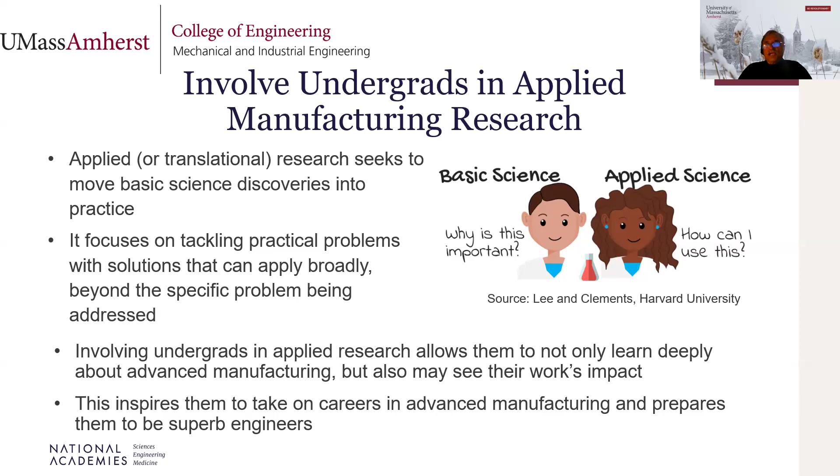This is part of the reason why we find skilled labor is a bottleneck for people to start their innovation or their small manufacturing company where they can start doing things, because they haven't had the breadth of knowledge that will take them into that next phase.

Okay, again, for lack of time, I'm going to skip. You can read the wonderful report that Arul put together for us, and I can share the link with you. You can read a lot more about it. And for sake of time, I'm going to skip so I can open for questions. Just kind of closing in 5 minutes, I want to walk you through who I am, even though I talked about manufacturing.

Sundar, if I can interrupt, Navjit had a question, maybe that's appropriate at this time. So, Navjit, you want to read it?

Sure. So, Sundar, you talked about the state in the US and some examples in India. A lot of manufacturing seems to take place in China. And I was wondering, what is the state of manufacturing in China? And is there a lot of advancement in AM, additive manufacturing, in China? And also, it seems a lot of the companies, even on the committee, are defense, sort of Lockheed and others. So is a lot of this work funded by defense?

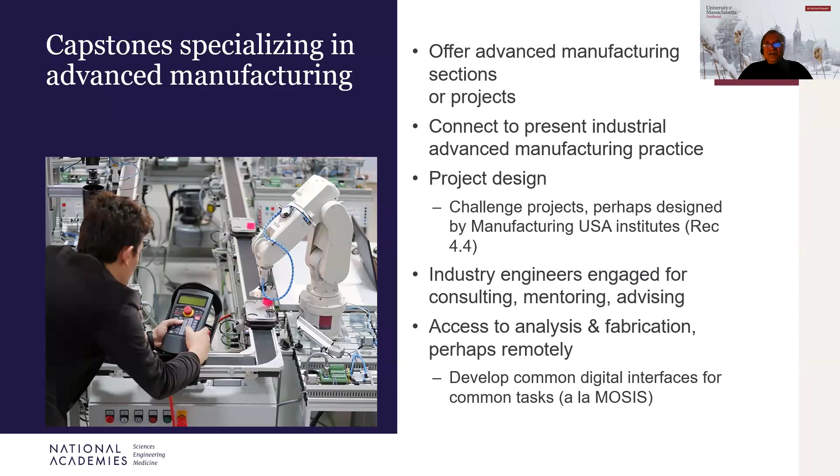So two questions really. You're very smart. This whole committee was requested by DoD. I probably don't have a slide. So the whole NAE study was requested by the Department of Defense. And what they felt was the compelling need for government readiness in advanced manufacturing. So that's why the people in this list you're seeing are primarily from defense and academia. That's the second part of the question.

The first part of the question, the advancement in China, it is a little difficult for me to get a reading, except anecdotally speaking. The reason for that is, Srinivas at Georgia Tech will know this too, somehow the advanced manufacturing field in the US has a lot more faculty from China. And that means a lot of our own graduate students have shown a little bit more readiness and interest in advanced manufacturing than domestic students and other international students.

Same time, the number of conferences, number of publications, if I take a look at them, they show quite a high number of high quality publications from faculty in China and faculty originally from China. Other than that, I don't know how the companies operate there or what they do in terms of production. One of the people I talked to is in Apple, and they have the factory there, and every month he's there. He comes back and tells me that all the things they do there are exactly prescribed by what they want them to do from here. So he has not seen anything innovation-wise, but again, that is anecdotal.

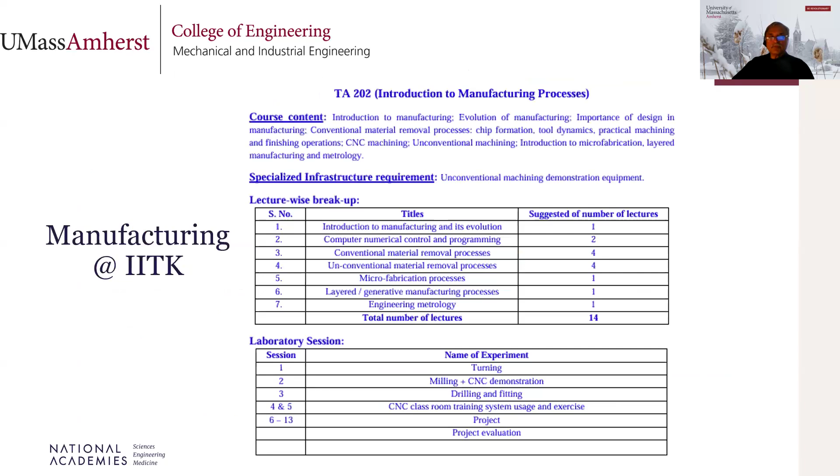Did I answer your question, Rajiv? Yes, thank you. Okay. So if somebody knows, they can share. I can get you anecdotal, but there is no study that I know that has shown it. Even our study didn't reveal it.

Oh, on the contrary, our study did reveal Europe is far more advanced than we are. Not in terms of just doing manufacturing, but how they have integrated manufacturing in their academic setting. So I actually went to a couple of places, Manchester in England and another place in Germany, to study the apprenticeship program. They bring vocational school students to take 1 year of prep work, they call it academic apprenticeship. And afterwards, they'll get their 4-year degrees or MS or PhD degrees.

And if you do a PhD degree in manufacturing especially, you have to spend at least 1 year in an industry setting, or you have to have an industry person in your committee, and the project has to be relatable to them. So they have done excellent work, in my opinion, in advancing both the academic side and industry side.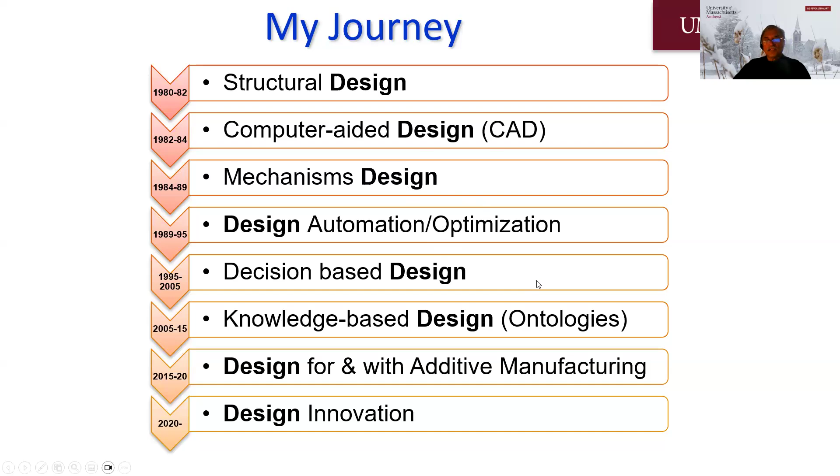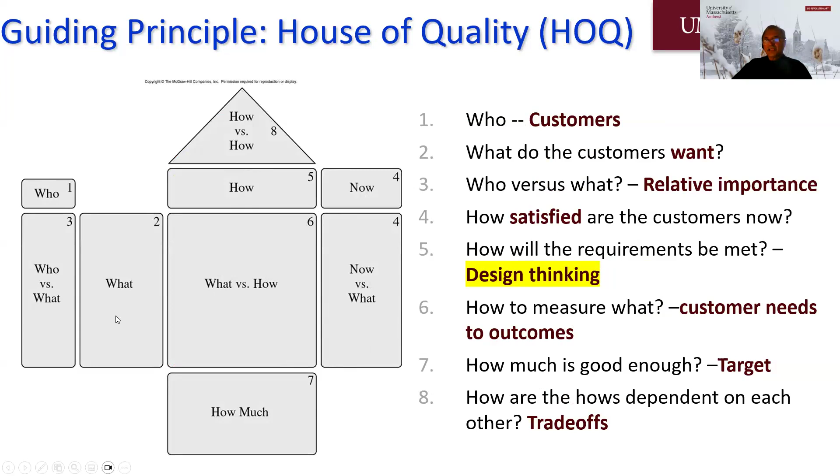Okay, here's where I am. If you notice that everything is design, that's who I am. So I'll just go the cartoon way, again, lack of time. This is something 101. Everything asked about design, I have this slide that I use to talk about what design thinking is. It's like knowing the what and the how, and how much, and what should we do now, and who wants what. So this kind of thing I talk to our students about.

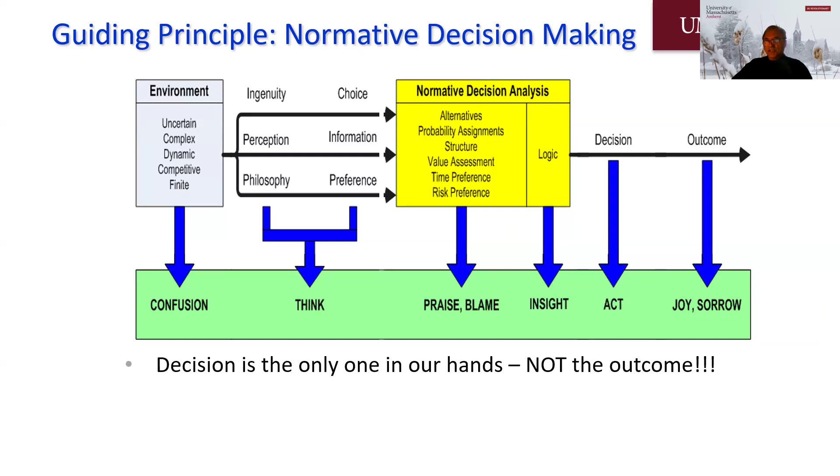I'm already behind. This is another slide, helpful for people from the decision-making side. When I talk about additive manufacturing, I can't tell you whether to manufacture the traditional way or additively, but I ask them to go through this exercise. We walk them through and try to compartmentalize: what kind of metrics they use, what kind of preference they have, and what logic they want to apply, and we help them with the decision as best as we can, referred to as a normative decision-making process. But with the caveat that this basically means you will make the best decision. That doesn't mean it'll be the best outcome.

Yeah, I just have a tidbit here. When I first joined the National Academies in 1999, I became a study director of a study funded by NSF, called Theoretical Basis for Decision Making in Engineering Design. It's interesting that you mention decision making, George Hazelrigg, so we have that connection too.

Sanjay, you have a question? Sure, if I understood what pitch you're making, I was playing devil's advocate. Can you speak a little louder, Sanjay? I can't hear you. Sure, sorry, I'm in a noisy environment, I'll try to speak up.

So if I understood the pitch correctly about lack of research and widespread research going on, etc. With my experience in the IC industry, there's fairly advanced manufacturing techniques involved in making finer and finer featured structures, but a lot of the primary research is conducted within the confines of advanced tool manufacturers. So the tool manufacturers are making, I'll call it the sledgehammers and anvils of today, but I don't think the people who operate these machines are counting on that - they're at best undergrad educated, maybe managers, into advanced process development, may have higher research education than that. But the tools themselves and capabilities are fairly advanced.

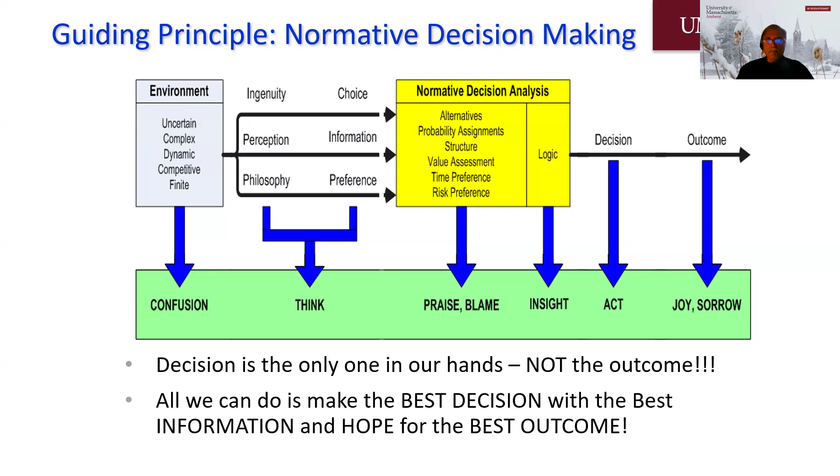Yeah, okay. Now my last slide is more of a cartoon way. This is how I look at everything about design: we start with something, this is starting with Raman's question, maybe I found out that I need more strength, so I'm going to add more material.

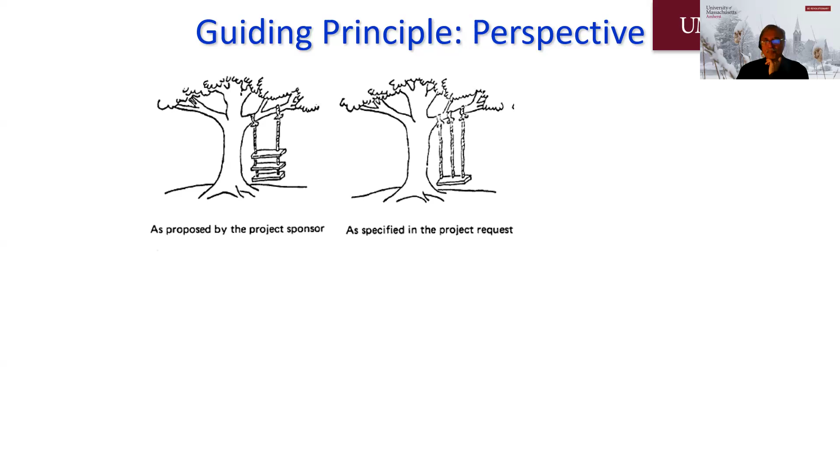And then somebody decides more material can mean more ropes, not more platforms. And somebody can say, hey, more rope means more length of the rope and not just necessarily three different ropes. And there's always a joke about manufacturing. We try to see a symmetry in everything we do.

And then it's actually get executed. This is the sequential way of doing things can go wrong. So when it comes to the tail end and the user side, there's the only way to make it work. Whereas if I had put this person initially who is more knowledgeable and part of the ecosystem and work as a team, one can hope for innovation to happen much better.

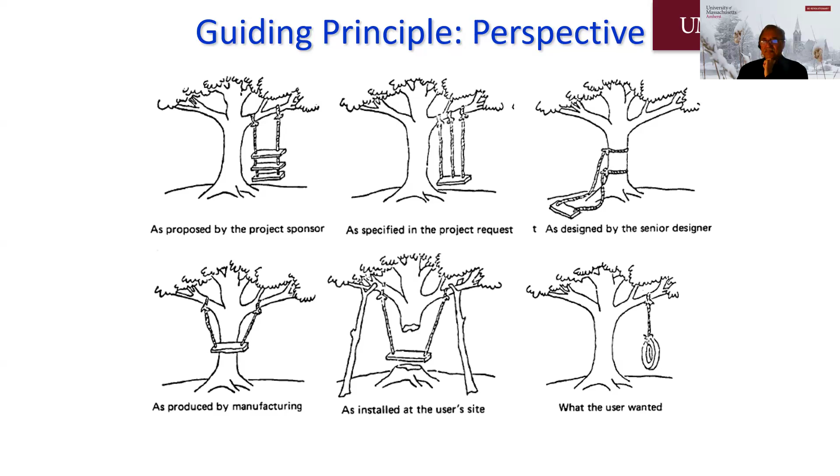But I found a better example than this. This came from our SDG group, and I will let this speak for itself. Yeah, both are really good cartoons.

I use this now in my class to say, well, why bother with any design? Just have an app. I remember in the early 80s, Dayanand, I think, kept telling us that every time somebody has to open the door, you had to make sure it doesn't fall. You had to have a thing. So no worry, kinematics and mechanics will always be handled.

Will be fundamental to everything we learn. And the next day, I came here, and the first thing I thought, the local grocery store was a sliding door where I didn't have to turn any knob. So who knows? Okay, so last but not least, I know we take this for granted.

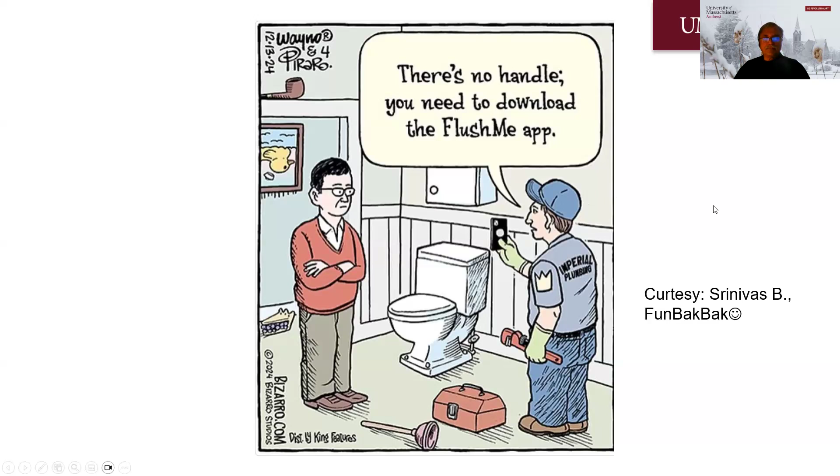I just want to give a shout out to our dear friend Sap. Working with him the last month, I came to know how much work he does behind the back to make it happen. So I know he's not here, or maybe here, but thank you, Sap. And you're doing a phenomenal work. Appreciate it very much. So that's it.

I'm ready for questions. Kushru as well, if I can give a shout out to Kushru, who sets up the Zoom talk and all that, and then shares the recording after that. So any further thoughts or questions? Any closing remarks? I see Kotesh.

Yeah, go ahead, Dilip. So I have some basic fundamental questions related to the AM process. First question, can we mix materials? For example, can I take a metal matrix and layer on top of that like a ceramic matrix or something like that?

Answer is yes. And in fact, there are machines that you can buy where you can have multiple different beds and you can feed different ones in different. I have an example of that. Let me see if I can find it. Yes, the short answer to the question is absolute yes. And you just have a different, you can have the powder bed mixed ahead of time, or if it's a directed energy deposition, you can do it in different steps. On this one, I'll show you.

This is not quite what you're looking for, but here's the one. If you look at the jetting process, we have a jet machine in our system, the material jetting. So you can have different... oops, sorry, I'm not sharing it. I just realized.

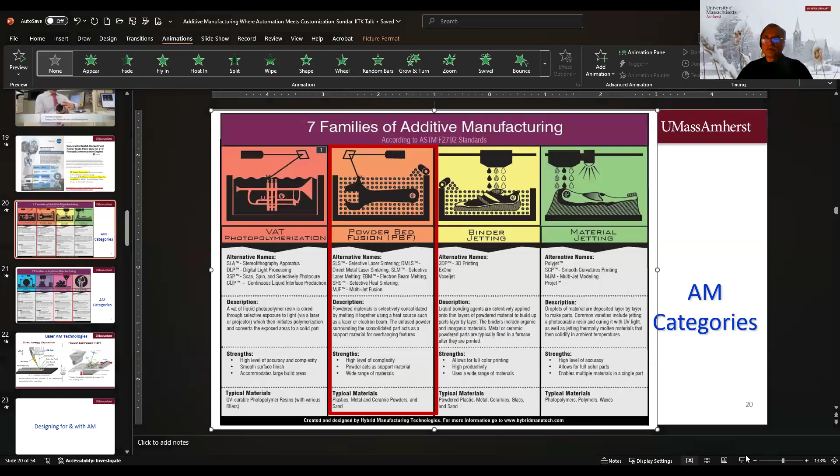So see the one on the material jetting and the binder jetting, the jetting ones that you can get those machines that you can mix and match. So you can see that drops coming through. So you can have different buckets sending you different material and you can make them composite.

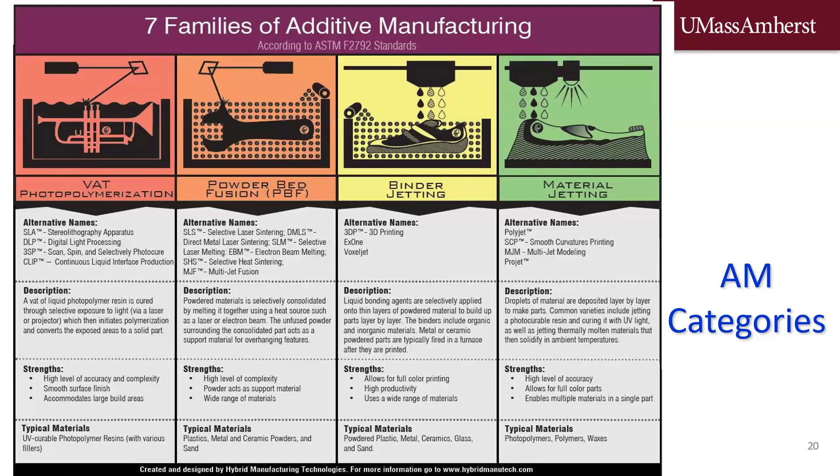Thank you. My next question is, can you provide directionality to the material properties through different types of layering process or through the different type of additive processes? Lot of work has been done in that, and absolutely yes.

Everything I mentioned here, this slide I borrowed from someone. I may not have given credit. This is for my class.

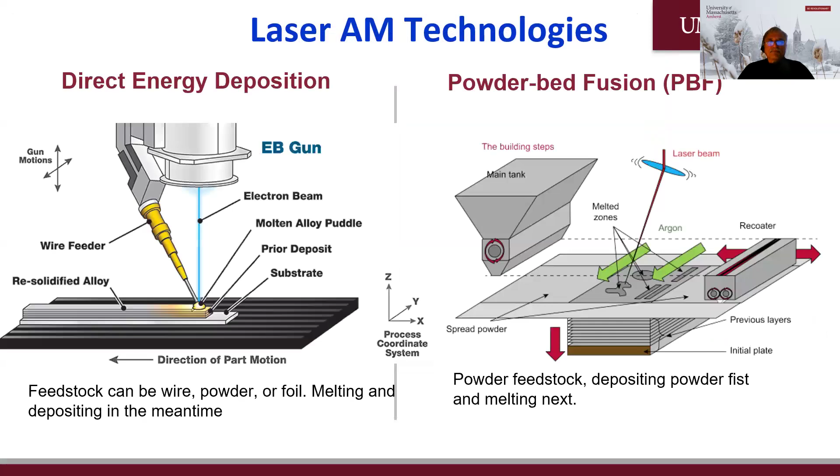A lot of work has been done to connect everything on the left to everything on the right. I hope that addresses your question.

So they can choose the laser type, power, and type of powder if they want particular viscosity. NIST has a framework, it's still a work in progress, but in a lot of areas it's fairly mature that people can just take and run with it. And if you buy an AM machine, that'll also have its own specs saying, look, this is what you can expect. If you have this setup, you can expect this property to come out of it. Did I answer your question, Dilip?

Yes, I mean just to know the basic question, and I can reach out to you separately for more specific things. Yeah, this is all more of a basic level, because there's so many additive manufacturing equipment makers, it's hard to keep track of what they're doing.

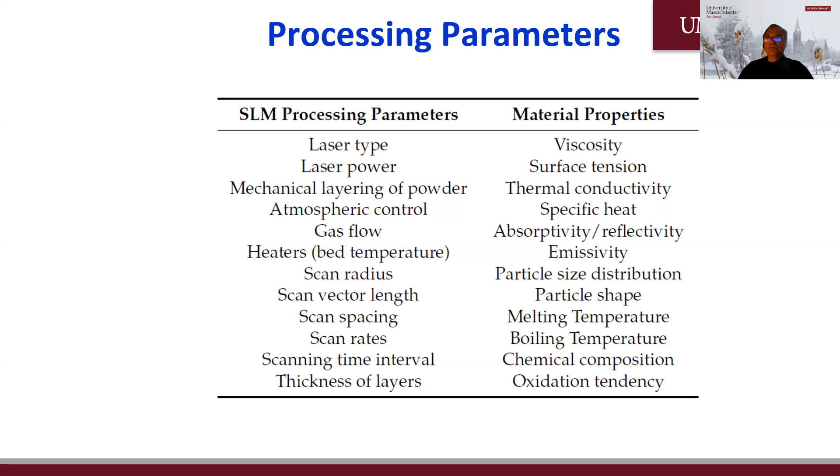And my last similar question - sorry, Dilip, let me finish. Just my last question: what's the effect of impurities, like gases or miscellaneous material that was not part of the original matrix you want to use?

Oh boy, I may not be the expert in that, but what I have seen is that post-processing can play a significant role in the final quality of your part. The post-processing, where you remove unnecessary, unwanted material, powder, unburned stuff - any number of things can happen that can significantly affect the quality. But with respect to what happened during the process, it depends on the machine itself. The ones I've actually had cameras installed on are fairly high end, so the reliability is fairly good.

But I've heard from people that it is a hard thing for them to be knowledgeable about how to design for it ahead of time. So I don't know if I answered the question - I don't have any data on that, but what I know is that is a big challenge.

So what I'm coming from is laser cladding or HVOF spraying and things like that, because they introduce a lot of errors or problems in the materials as you're coating them. You had talked about using lasers, but I'm familiar with laser cladding or spraying, and they introduce a lot of problems along the way.